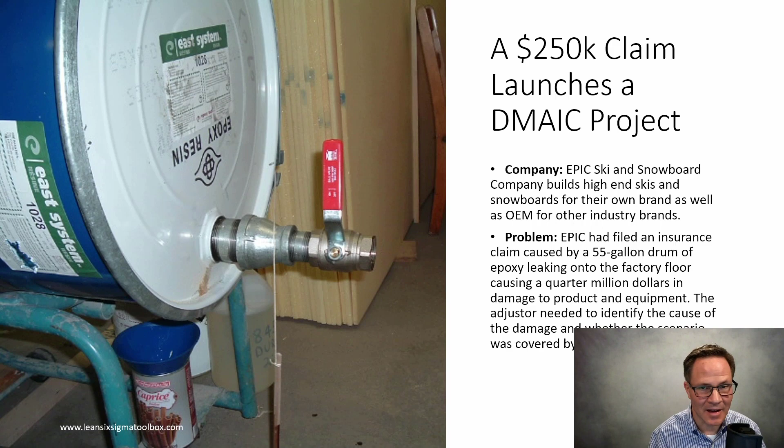So we started doing a DMAIC project. In the define phase, they identified the problem as simply that employees were making mistakes, forgetting to do their job, and not turning off the valve. There were a lot of other things they weren't doing as well that they were supposed to do, and because of that, they continued to have these sorts of problems.

The insurance adjuster came out and said, why don't we go through and actually solve this problem so we don't have to make another claim next month when this exact same thing happens again. So that was when we started going through the DMAIC process.

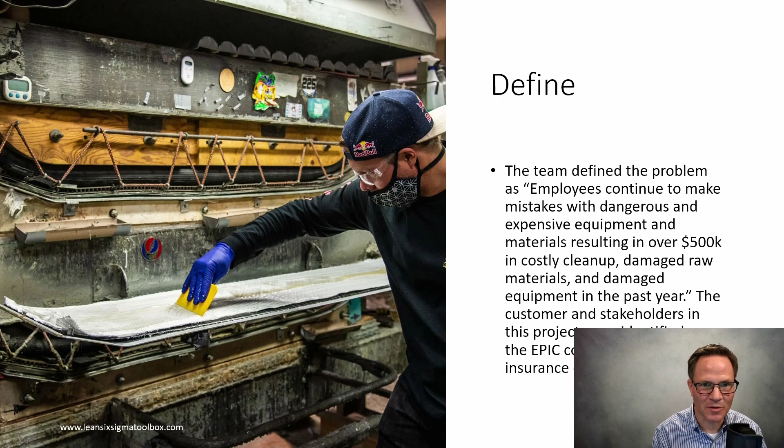Since the problem was fairly easy to define, the next step was to go into the measure phase and identify where in the process the waste was happening, where the quality issues were happening, and see if we could identify some quick wins and small changes to make the process better.

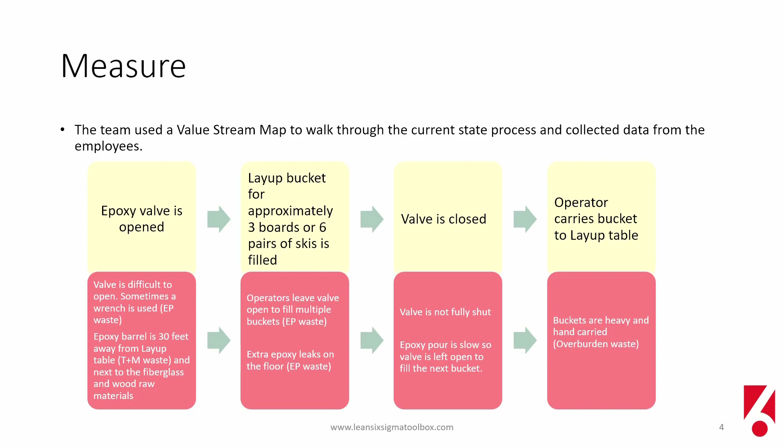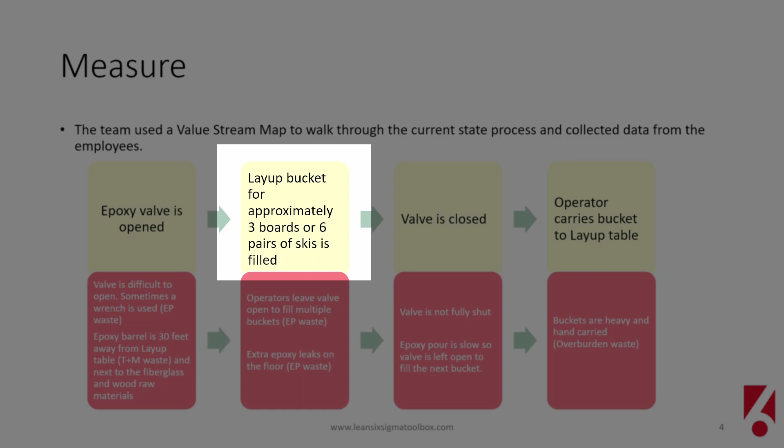So the process was pretty simple. The epoxy valve would be open. The team would stick the epoxy into a bucket and get enough for about 3 to 6 boards or pairs of skis, depending on what they were making. Then they would close the valve and carry the bucket over to the layup table.

But what was really happening was a little different. They would get the bucket, and because there wasn't enough pressure or it was going too slow, they would leave a bucket underneath the valve and let it fill up while they carried another bucket over to the table and started laying up one of the boards. Then they would walk back and close the valve eventually once that other bucket filled up.

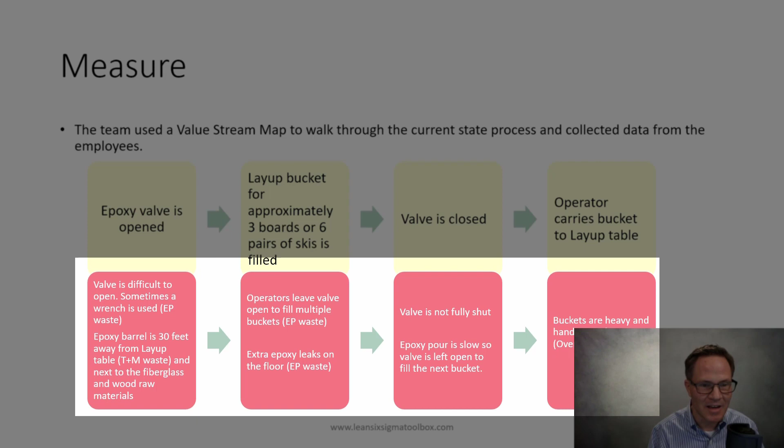So there were a lot of things wrong with that, obviously. One problem was that the place where the epoxy and resin is kept is about 30 to 40 feet away from where the layup table is, so there's physical travel waste happening back and forth. Sometimes the valve wouldn't shut off completely. And sometimes, because multiple people were working on the team, one person would fill up a bucket while the next person would already be on their way.

So they'd say, okay, just leave it on for me and put another bucket there. And so they were kind of trading off. So nobody really owned the resin barrel, right? It just was being shared by multiple people, which obviously can cause a problem.

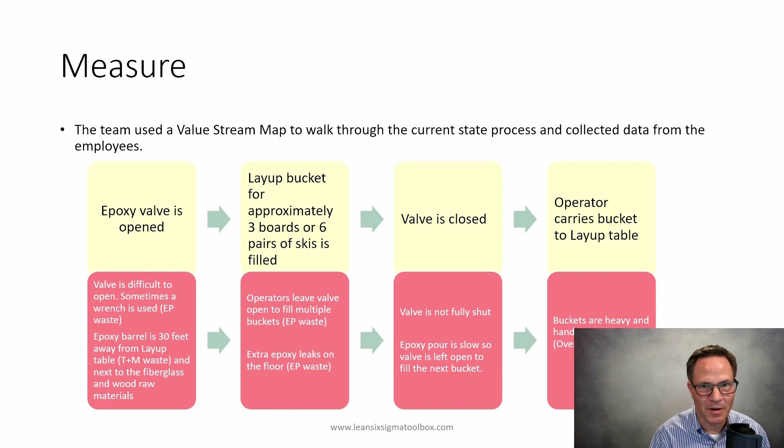So we did a 5 whys root cause analysis and asked, why is the epoxy barrel valve being left open? Well, because the operator keeps leaving the valve open. Why do they do that? Because they're filling up the bucket and they're in a hurry. Okay, well, why are they in a hurry? Well, they're in a hurry because the epoxy comes out really slow and they've got to go over and hit their numbers and try to make their quota for getting their boards built.

Why is it pouring out so slow? Well, because the valve is pretty small and maybe it's cold in the warehouse and we're not cranking up the heater in this huge warehouse. So the epoxy sometimes moves a little bit slower than maybe it should. Sometimes the barrel is just low and it's not tilted enough, right? It's just kind of laying there flat. So there's not a lot of pressure pushing that last little bit of epoxy out.

So the bottom line is the operators are in a hurry. And to be efficient, they just leave it on to put another bucket under there and then go over and start doing their work. And of course, them trying to be efficient resulted in the problem of the epoxy spill.

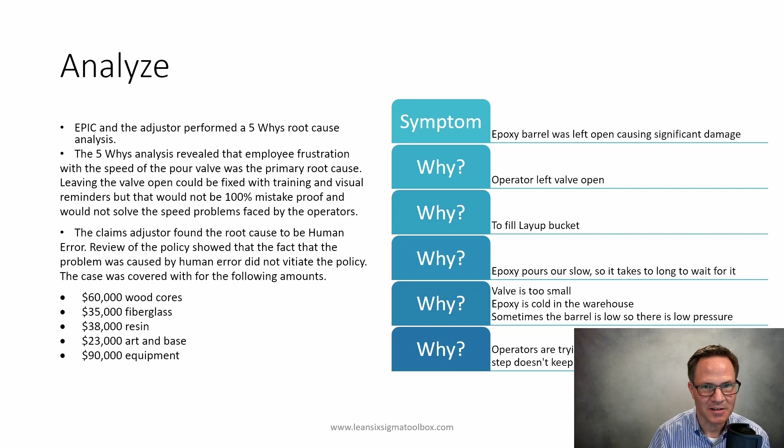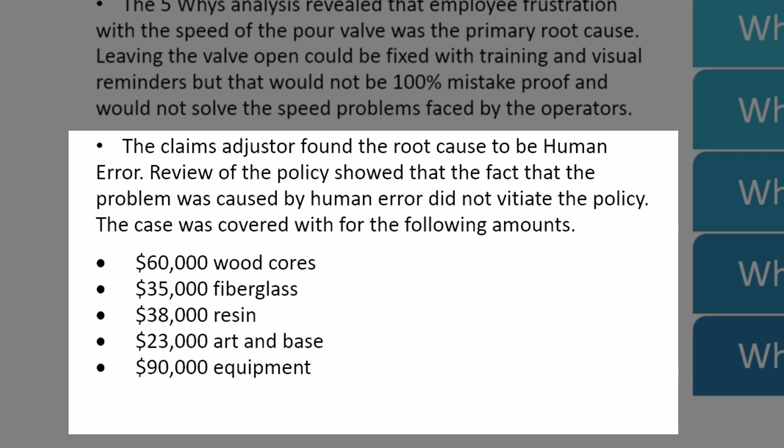So the claims adjuster reviewed all of this and they reviewed the damage. And it worked out to be about $250,000 worth of damage, right? $60,000 in wood cores that were damaged. There was some fiberglass and the loss of the resin, as well as the art and bases that were near that. So there was a lot of damage that took place just because this leaked in a really inconvenient spot, unfortunately, right by where a bunch of material was being stored.

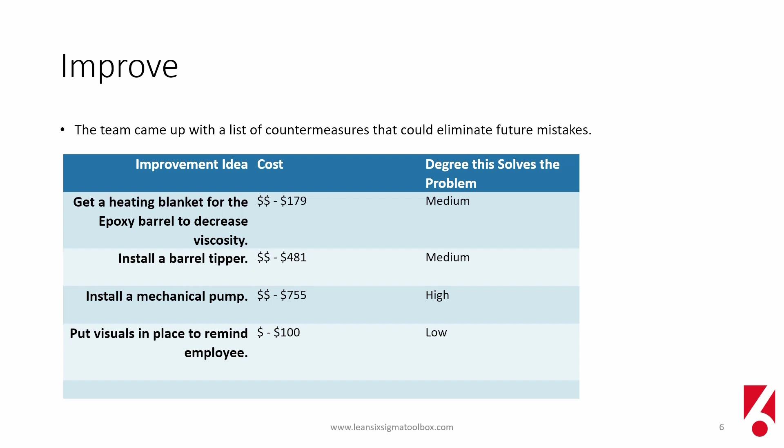So as any good team would, they got together and they started to brainstorm, what can we do about this problem? How do we make it better? Are there some cheap and easy solutions? And then, of course, what are the expensive solutions?

So the cheap and easy solution, of course, is to put visual controls in place, right? We could put up a sign, remind people to turn off the valve, make it a rule that you can't turn on the valve and leave it open, and try to discipline people or train them to get them to comply with the way things are supposed to be done. But that's not really going to provide a long-term solution.

So instead, what are some more mistake-proof type mechanisms that we could put in place? One of those was they thought, hey, we could put in a barrel tipper that would give us more pressure, allow us to pour faster. And then somebody said, well, why don't we just get a mechanical pump and that'll pump it out even faster. And then when it's down to the bottom of the barrel, it's still going to pump out just as fast and get us all of the epoxy out. That seemed like a good idea.

Somebody else suggested, hey, it's cold in the warehouse, so why don't we get a heating blanket or heating element for the barrels that we could put on and make it a little bit less viscous, make it pour a little bit more quickly. All of those are good ideas.

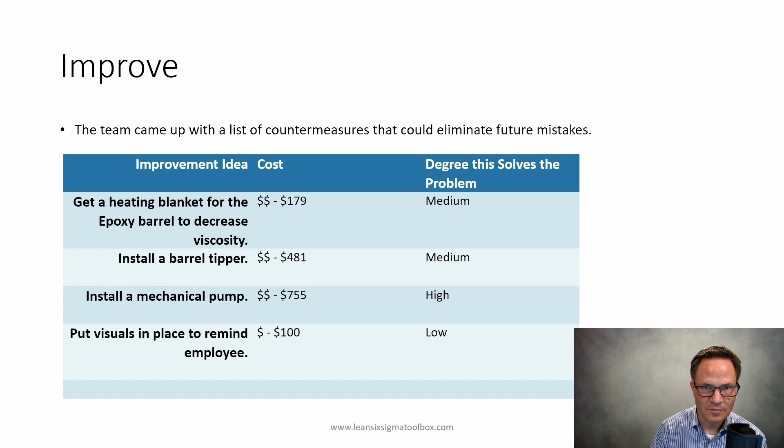So after we looked at the cost of those, we said, okay, what are we going to do? Well, the electric pump wasn't that expensive. $755. We lost way more than that in resin just by our mistakes. Plus, it will allow us to be really precise. We're supposed to do about 30 ounces of resin per board, and a lot of times we would overpour and have leftover resin just sitting in our bucket. So we figured we could be a lot more precise if we had something that actually metered the amount that we were taking out.

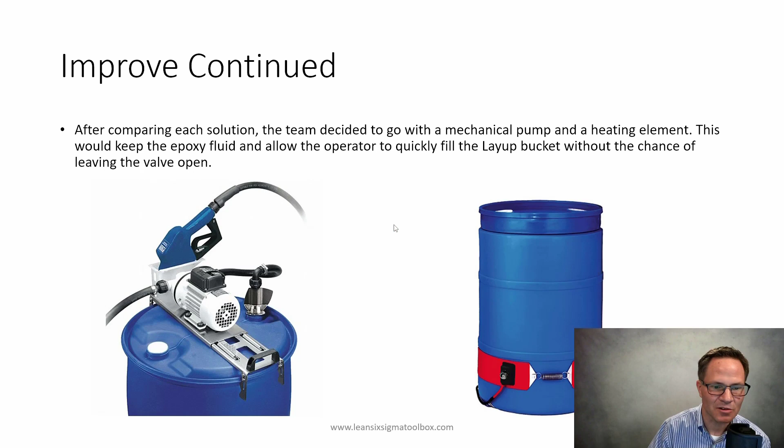We found a couple of heating elements online that you can put around a barrel to heat it up and make it a little bit less viscous, and you can control the temperature on those. That was about $180, a couple hundred dollars—super cheap. And now we've got some ideas on how we can actually solve the problem.

In the measure phase, in addition to doing your value stream map, you also want to do some data collection—try to plot on a control chart or run chart how your process is performing. The one metric we thought of was how many ounces we're using per board or per pair of skis, measured over time. Not every board or pair of skis is the same length, and some are much wider, so they use more resin. But if we track that by batch, we can see if the new electronic pump gives us better material utilization.

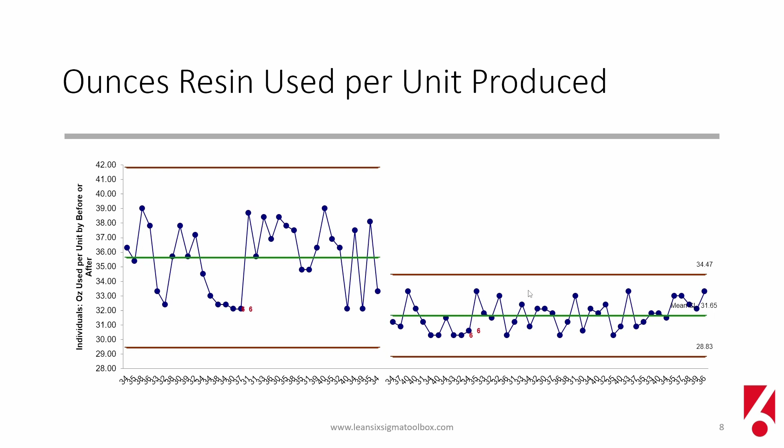Here's before the Kaizen event, here's after the Kaizen event, and you can see we're getting lower and more consistent results with the electric pump than when we were just filling 5-gallon buckets by hand. So with the improvements made, we go into the control phase.

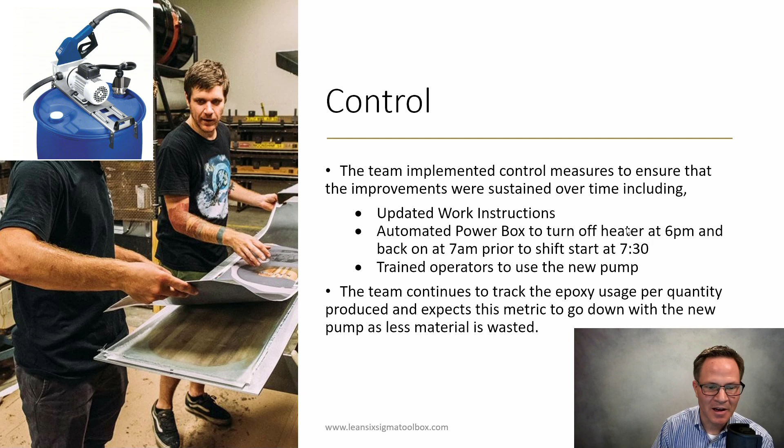We updated the work instructions to train everyone on how much resin to use. Then we put a power box on the electric pump so it would turn itself off and turn the heater off at the same time, so there was no chance we could leave the pump or the barrel heater on overnight. That's one more level of mistake-proofing, plus training everybody on the new equipment—how to make sure it's safe, 5S, and taped off.

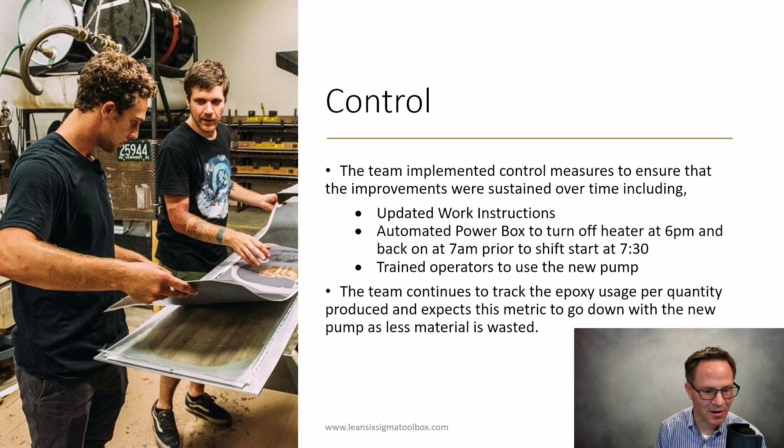Unfortunately, I don't have pictures from this because this project was many years ago, before I started being smart enough to use my camera to take lots of pictures when I did projects. So I don't have a lot of great pictures of this, but it was a good improvement.

The results of the project were pretty good: no spills for the next 3 months. We invested about $9,000 in people's time and labor, plus additional costs of the heater and electric pump—about $1,000 there. But cost avoidance was the big thing: we think we saved about $40,000 annually in epoxy and resin, but $250,000 in cost avoidance—that's how much the insurance claim was because of the damage caused. So that's an ROI of about 3.4 times the investment, and a payback of just 11 weeks, which is pretty good.

This was a great example of how an insurance claim ended up being a good thing for the company, where the claims adjuster and the team worked together to find a solution that would prevent future claims from happening, which of course prevents your insurance rates from going up.